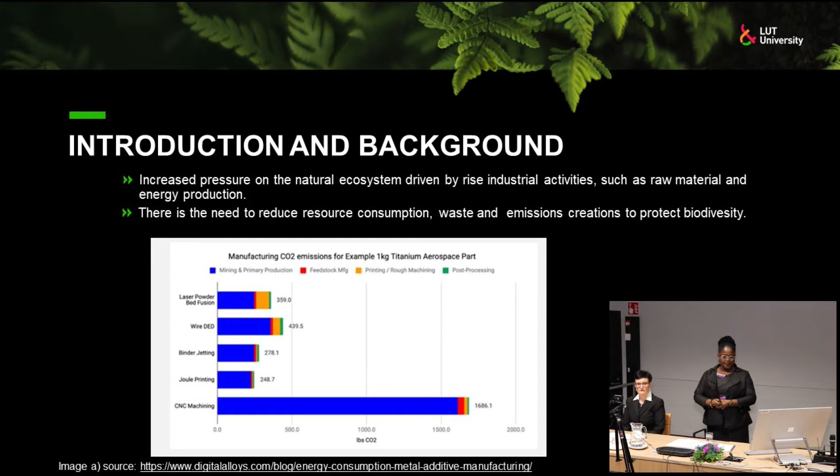Then what is additive manufacturing? So my main thesis is about additive manufacturing. We might have heard about 3D printing. 3D printing and additive manufacturing are the same. Additive manufacturing is the engineering term, and 3D printing is the common name for it. Additive manufacturing can be defined as a process of joining materials to make parts from 3D model data, usually computer information, layer by layer, as opposed to subtractive manufacturing, where you have a big block and you're cutting away. Or formative manufacturing methodologies, where you have a liquid and put it in some mold and it forms it.

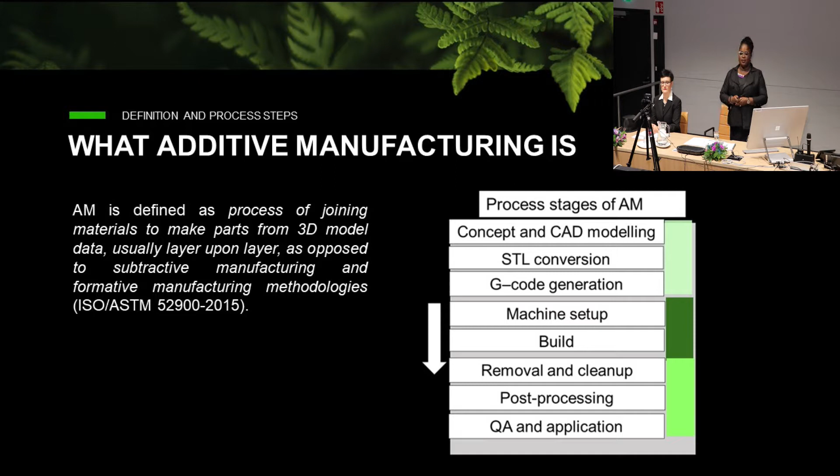So additive manufacturing, we know, is growing year by year. If you look at this graph, we will see that the share of application is almost the same, but value-wise, it is really increasing. And here are some of the common users of additive manufacturing.

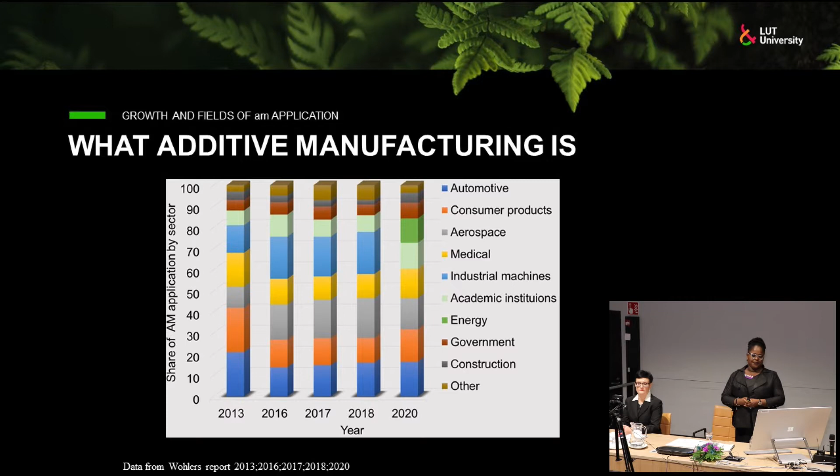Now somebody may ask, what was my reason for choosing laser powder bed fusion? Laser powder bed fusion is a manufacturing method that is helping industries to create really interesting geometries which were not possible with conventional, traditional methods. Also about sustainability: additive manufacturing is a growing technology, but in the literature there aren't really studies relating to the environmental, economic, and social aspects. And in the current world we live in, everything is talking about sustainability. So I saw the gap in literature, and I tried my best to fill it, and this is what led to the study.

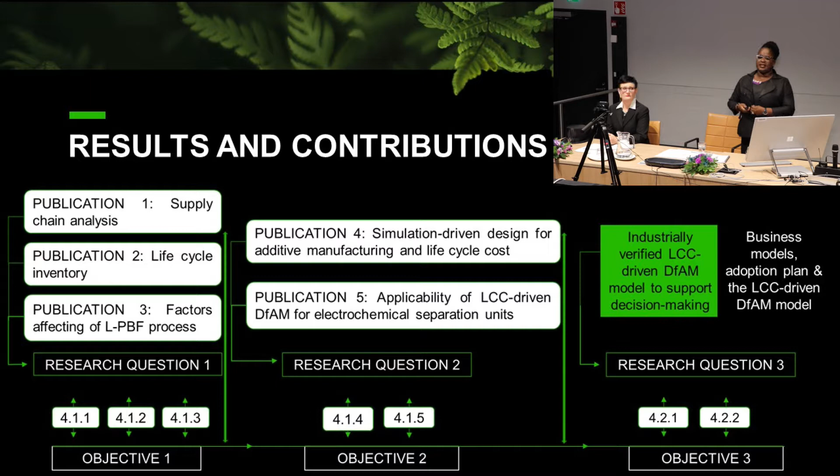And then the final part, which was the summary of the thesis, was interaction with business or industrial representatives to analyze how this tool, the life cycle cost driven DfAM model, could help them to achieve the necessary benefits in terms of economics and also the environment. So this is still about what I have already mentioned.

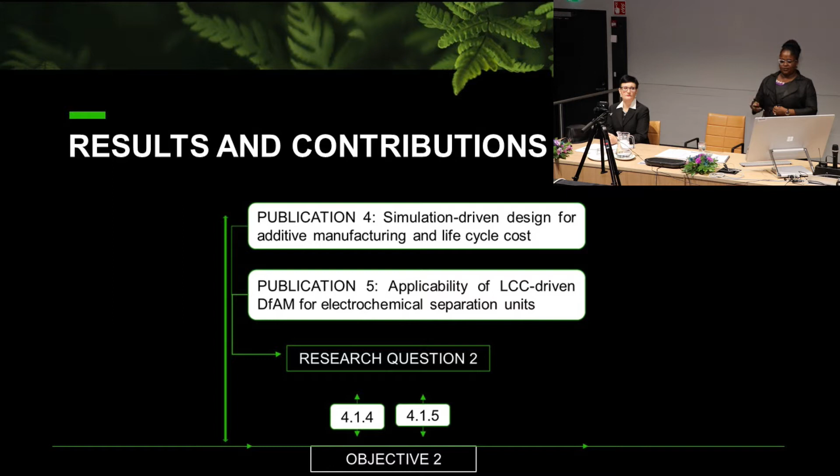Okay. So the main scientific contribution were the 5 publications, and also the identified ways resources and cost efficacy can be achieved. And some of these things were the product design. It was identified that the product design, which includes the manufacturing process, and the materials, and also the process parameters, which we are selecting from the machines, such as the laser power or the scanning speed. All of these have an effect on the process.

One thing also I have to say is that additive manufacturing, or the laser powder bed fusion, is being criticized for the high energy usage. And so on the manufacturing phase, when you're able to optimize these affecting factors, we are able to reduce the energy consumptions. And also the material usage of the process was something that was quite impressive, because it also affects the sustainability, as you can actually build from the exact amount of material you need without creating waste or excess powder. And let me also say that powder bed fusion is based on metallic powder, so we don't have a block of metal, but just a powder which we are laying layer by layer. So here are some of the identified things that you could use to enhance the resource efficiency and cost efficacy.

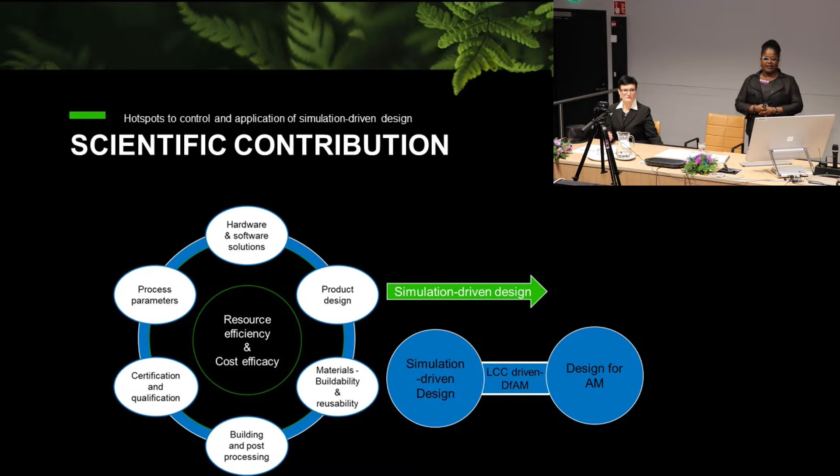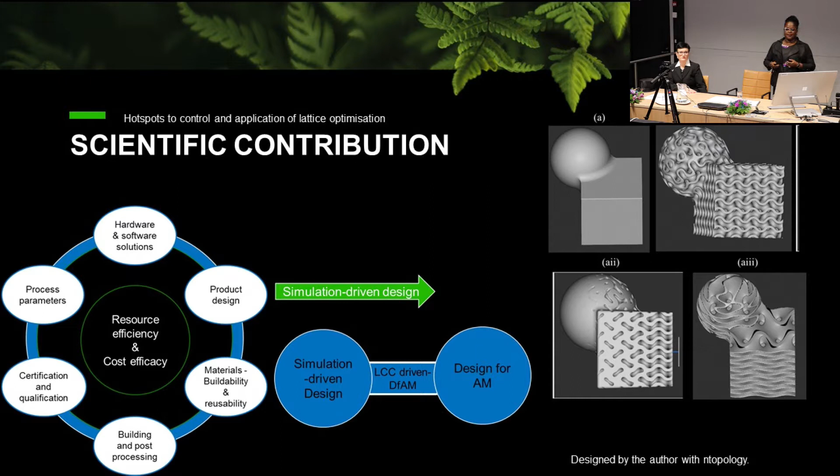So then simulation-driven design was using computer-based tools to plan your design, based on DFAM, as I said, design for additive manufacturing. Here is an example of design optimization, what we call lattices. So you create the components so that instead of having a solid body, you create holes inside them intentionally to reduce weight and also to enhance the functionality. Here is another optimization, what we call topology optimization. So you're also creating intentional holes to enhance the functionality and also to reduce the volume of the components.

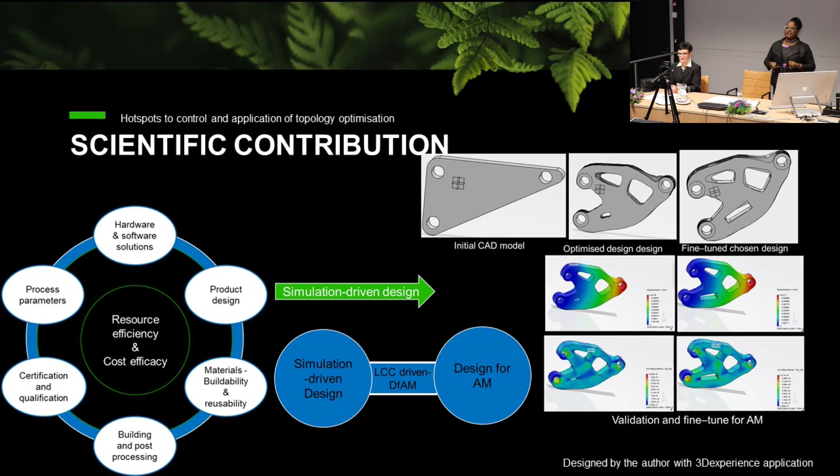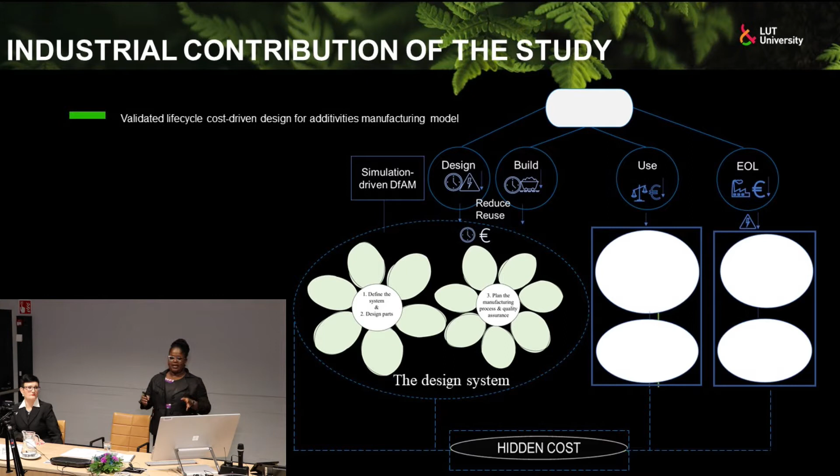Then here comes the main contribution, which was derived for the industry. It's called the life cycle cost-driven DFAM model or tool. So here it is talking about first the design. So we have the design system, where we are talking about the computer programming and designing the model, and also the production phase. These aspects affect a lot, and you should be able to consider all these green areas of the box.

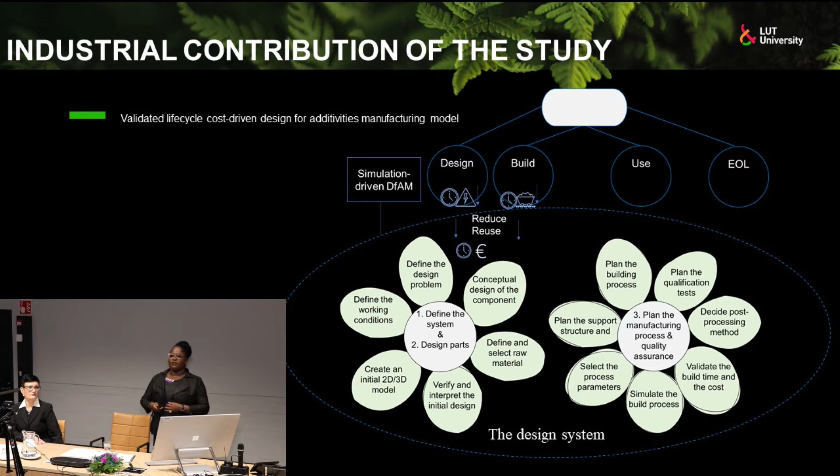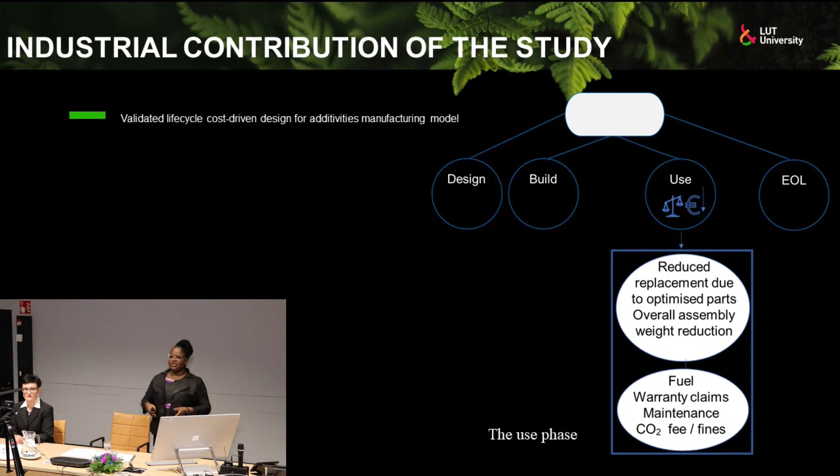Then when it comes to the use phase, once you have an optimized component, additive manufacturing assures us of better functioning components. For example, if it's an application for aerodynamics, which means a flying aeroplane or something, we are going to reduce energy, because the heavier the component, the more fuel you are consuming; the lighter, the less fuel, and then you reduce the carbon dioxide. And that is one functionality or benefit of additive manufacturing, for instance, to aerospace.

Then when we have finished using the parts, we are sure we can reuse it or repair it for another reuse, because the component is designed such that it is reusable, it is thought into it, and it can also be remanufactured for another use.

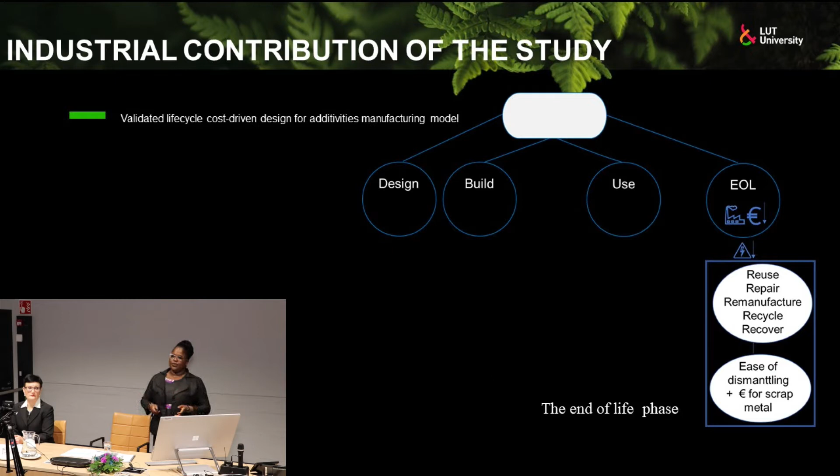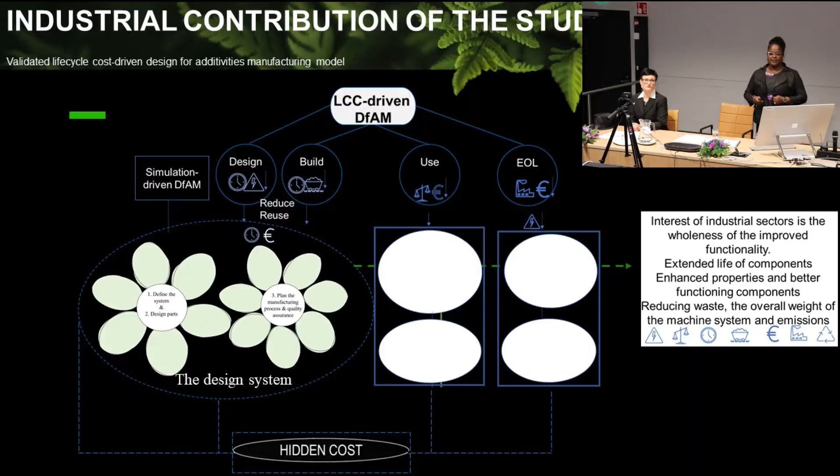But then there is something industrial companies were hinted to, and that is the hidden cost. So it's not just about the process. Something like post-processing, if not well planned, can actually bring some surprises to the companies. And this model was able to identify that and point it out to industrial users. So the whole interest of additive manufacturing is not just the production. The industrial companies shouldn't adopt it looking only at the production, but they should also look at the entire value chain.

So if we have a machine like this size, and then we have a unit like this, and if we can reduce it to half the weight, and there is a motor driving this unit, a motor needed for the big component might be bigger than a motor needed for the smaller component. And so you are also enhancing the whole product system, not just the component you are making with additive manufacturing. And that is something companies will also have to consider in their decisions.

AM reduces the energy, the material, and also the emissions, and then the overall cost. So those are the cost drivers in every manufacturing or industrial sector. So this is an overview of the different life cycle phases. When we have a product, we have the design, and that is where you can mostly do a lot of the optimization with AM, and then you build the part physically on the AM machine. Then you use it, and then you come to the end of life.

So there is what I'm calling the 6 R's. You should be able to ensure that your design is able to fulfill a lot of these 6 R's, if not all, to be able to ensure a sustainable or circular economy. And AM is offering companies the means to rethink, redesign, and reimagine designs that were not possible in the previous manufacturing era.

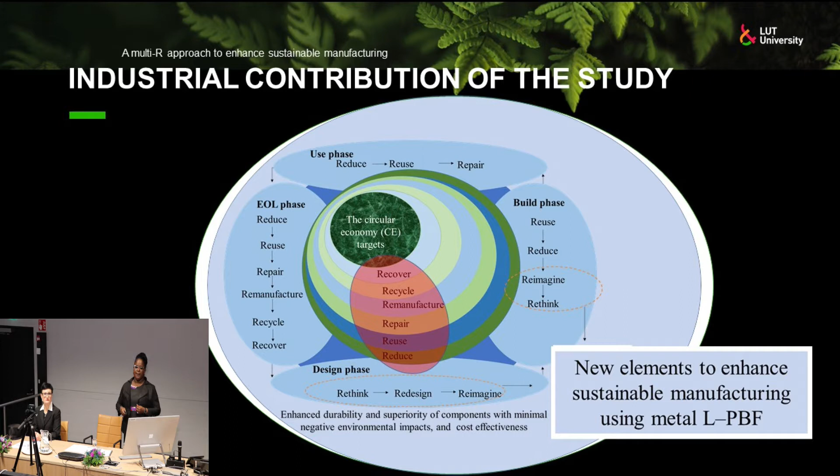In conclusion, I would say that additive manufacturing is considered by industrial companies, just like any other manufacturing method, in terms of the enablers and then those things that are not helping the company to grow. If you look at the pluses, the enablers, it gives lighter weight, and it also enables the engineers or the companies to create customized components.

So for example, if somebody has had an accident and we need to replace a part of their body, we don't need to pick up anything, but we can actually measure your parts and then really model it to suit your body so that the body can grow again through it. It's compatible with you, as an example. It also enhances functions, and that is also one of the things helping additive manufacturing to grow.

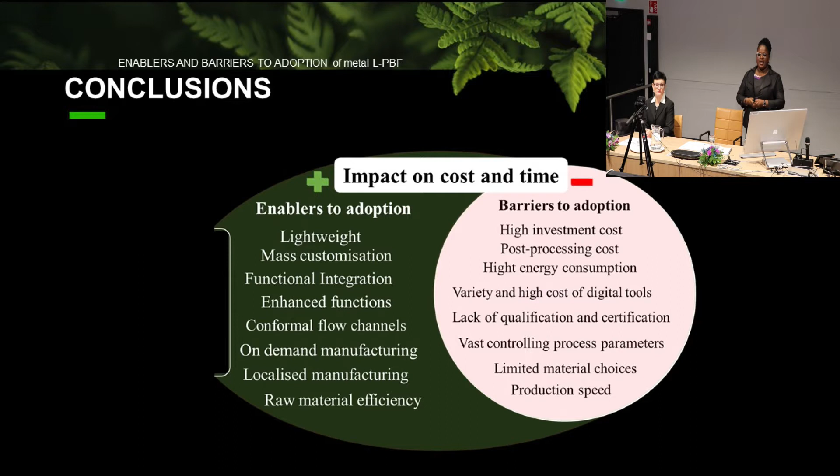Then there are things that are not helping it to grow, or barriers to adoption, such as the high investment starting costs, and also post-processing. As I said, it's something that is really limiting the usage of metal-based additive manufacturing, especially laser powder bed fusion.

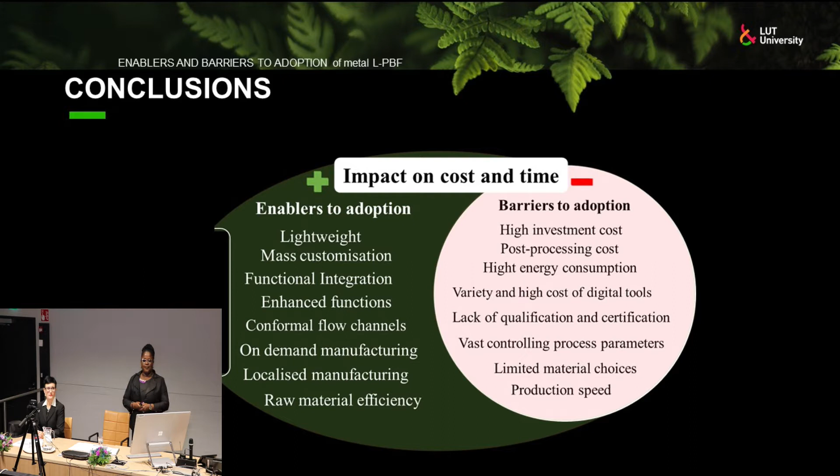In conclusion, again, I will say that additive manufacturing must be used with optimized components and simplified support structures. The support structures are needed to make sure the component builds well, but notwithstanding, they must be considered well in advance because their complexity will affect the overall cost, and this is something that must be planned already on the computer or in advance.

We must design to improve value creation through prolonging the life of the products, and not just because we've heard about additive manufacturing, we want to apply it. There must be reasons, such as to enhance the functionality, the lifetime or the service life.

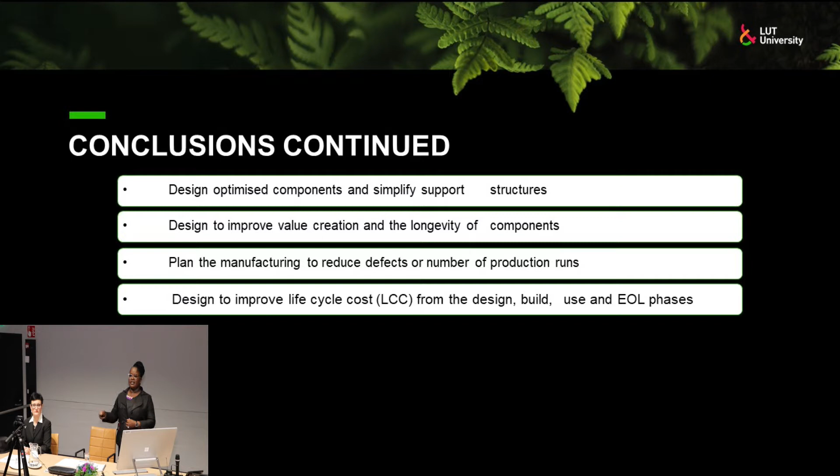The manufacturing must be planned to reduce defects and the number of production runs. So we have the computers to run the simulation and see how well the parts operate, and this is something that we need to plan well in advance. We must design to improve life cycle costs. So looking at the design, manufacturing, the use, and then the end of life. All of these must be considered and not just the production only.

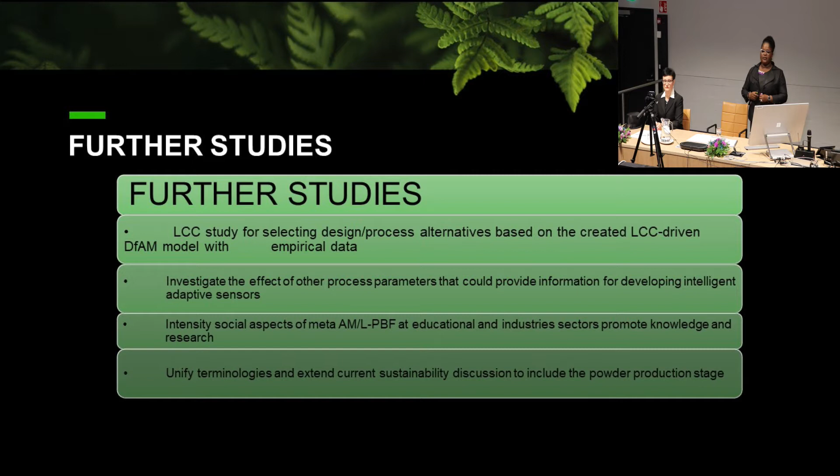Some recommendations for further studies is that companies or anybody hoping to use metal additive manufacturing or laser powder bed fusion for metals must consider the design process alternatives based on life cycle driven tools. It will help them find the best adoption plan. And also investigate effects of other process parameters.

So new studies or people who want to further study must concentrate on helping to find information about how the process parameters really affect the process. Because there are studies required to study the effect of the other. There are several of the processing parameters that affect the process, and this study is only limited to five to six. So it is necessary that other studies are able to go deeper into it.

The social aspects are not very much studied, and that is something that future studies can also study more on to see how it's affecting the social aspects. And then one thing that hindered also additive manufacturing was lack of standards. And now there are standards coming up, but the companies are not using them. Or students are not using it.

They still use the unstandard names, like some use 3D printing, for instance, in academic journals, or they use SLS, which is also an old term for the whole process. This is something that must also be enhanced, that when future studies are coming, they must use the terminologies as used by the official bodies to enhance the credibility of their work. Thank you very much, and here are some references for the study.